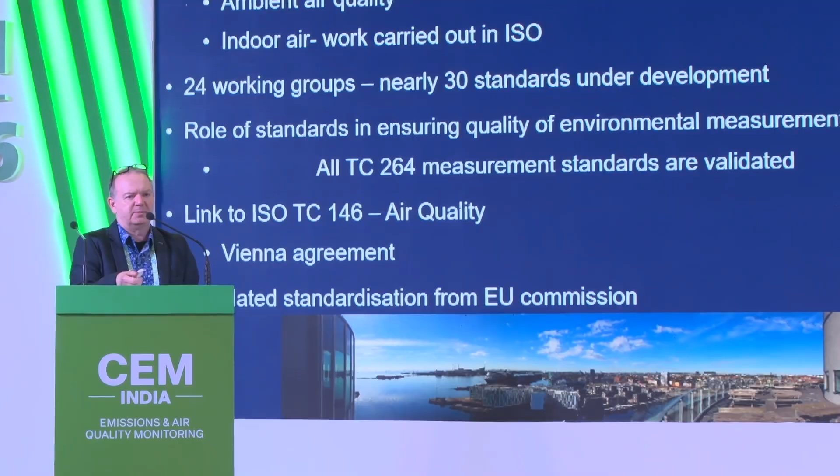So CEN-TC 264 is a standardization committee. It's responsible for the emissions standards and the ambient air quality standards in Europe. And most of those standards that we develop are there to provide the measurement capabilities to underpin the regulatory instruments, so the regulation within Europe.

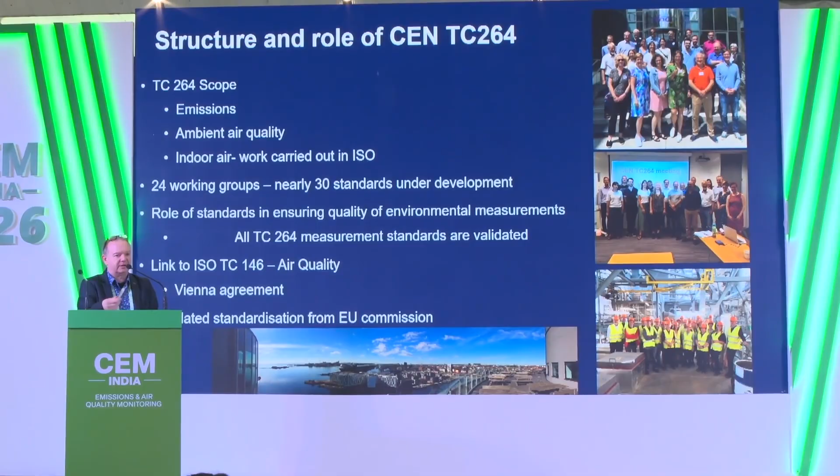We have 24 active working groups at the moment, so each one of those working groups is made of technical experts. Those experts come from industry, they come from instrument providers, they come from regulatory authorities, and between us we are developing, I think, more than 30 standards at the moment.

One of the key things that we do with our standards, the measurement standards in TC264, is that they have to have validation data. So when we produce a measurement standard, we also have to do validation studies to understand the performance that that standard can provide. We also work closely with ISO TC 146, which is responsible for air quality standards and emission standards internationally.

So within ISO TC 146, that covers stationary source emissions, workplace, ambient, some general standards, and currently in the general committee they're working on a standard on the units that are used and the definition of units of measurement, also meteorology and indoor air. And the Secretariat of Subcommittee 1, which is the stationary source emissions, is held currently with NPL India. So there are 3 work items currently underway in 146.

2 are the revision of the flow standard, and we've heard talk about reporting mass emissions and emissions trading, and clearly if you're going to do that you need to be able to measure flow and have flow CEMs, and so those 2 standards provide both the manual reference method and also the CEM standard for flow monitoring. And there's also a gaseous fluoride standard under development.

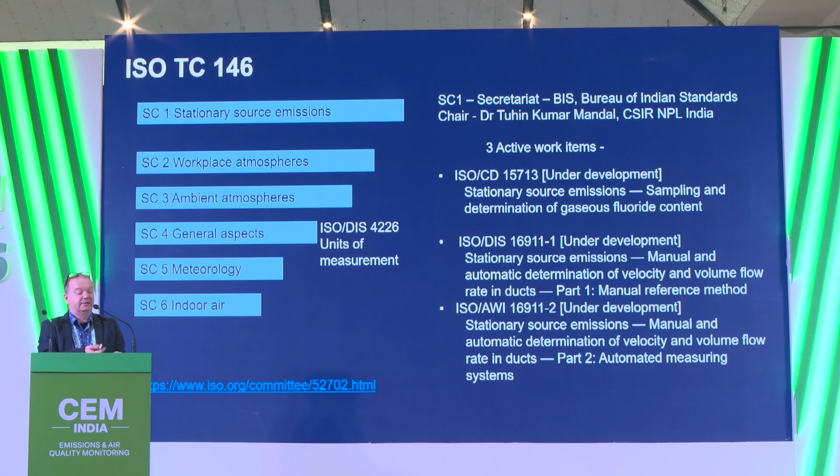Within Europe, as I say, we are driven by a number of regulations, one of which is the Industrial Emissions Directive. And a lot of the work that we're doing at the moment related to emission standards is because the regulation was revised in 2024 and is coming into force pretty much this year in terms of some guidance which the Commission is producing and an implementing act.

And currently there are about 37,000 industrial installations and about the same number of industrial farms. So the revision of the IED brought agriculture into the regulation. And so the kind of emissions monitoring needed there is fugitive emissions monitoring from the waste handling and the barns. So we have a number of new sources.

And the regulation also brought in a whole range of new industrial sources, including landfill, some metal and the battery factories and recycling. And one of the big issues we face at the moment is that the regulation is forcing the emission limit values, the concentration levels, down. And so we are having to revise the standards to meet lower and lower levels.

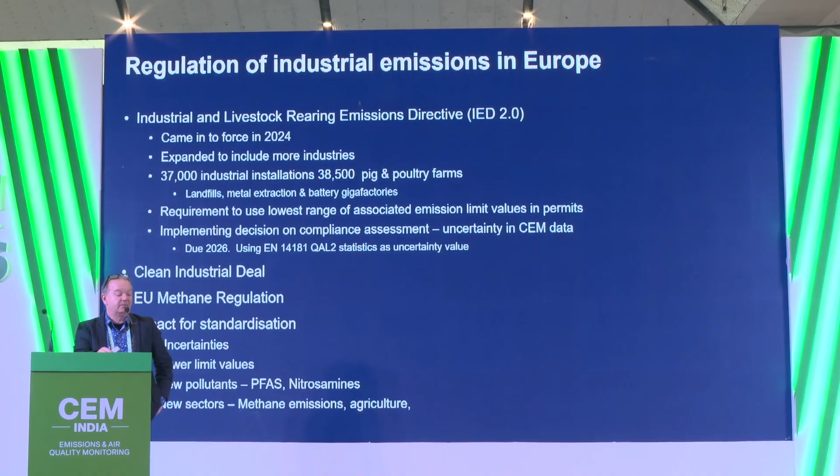As I mentioned earlier, the Commission has also published a clean industrial deal, so the regulation there is pushing for growth through cleaner industry. We also have a methane regulation, which is an act requiring the energy industry, so the gas industry and mining, coal mining, to report and measure and reduce methane emissions. And so this is all forcing new standards to be produced, including new pollutants, and we're looking at PFAS and nitrosamines coming from cleaner energy, and new sectors, as I say, methane and agriculture.

I just wanted to put this slide up to show how we manage the whole quality of emissions monitoring in Europe. And we heard a lot about the kind of requirements from Sanjeev around putting in place the quality assurance. So the primary standard that we have is EN 14181, and that defines how CEMs or AMS instruments are brought under control. 14181 provides how we control the quality of the data from the automated measuring systems, or the CEMs systems.

And the way that works in Europe is that we have the pre-assessment, so that's the type approval, the same kind of testing that NPL India are undertaking for the Indian market. And the performance testing standard is 15267, and we have a part 3 for continuous monitors and a part 4 for portable instruments that are used if you're going to calibrate instruments using them as reference instruments.

And the way that we control annually the CEMs instruments in Europe is that accredited test teams carry out reference measurements, and so the calibration is against reference standards. And so we have reference standards and we have alternate reference methods which are then used on annual assessment of the analyzers. And that's both a calibration, the QAL2 approach, parallel measurements with the reference method and the CEMs, and then the annual surveillance checks. So every 3 or 5 years, we do a recalibration.

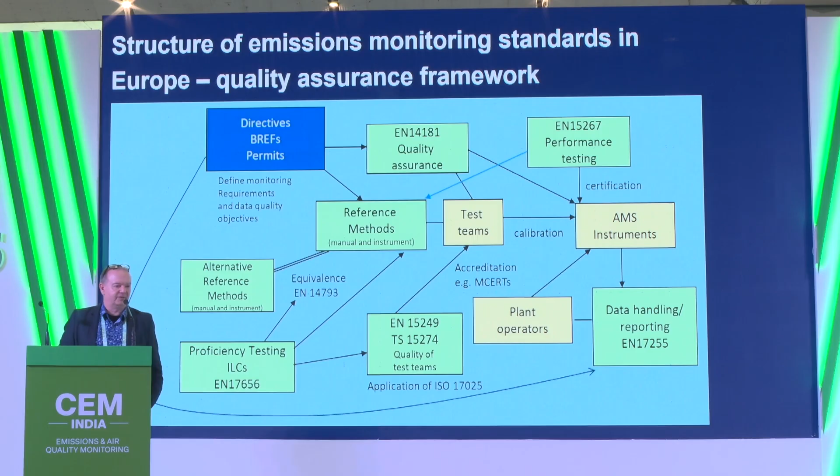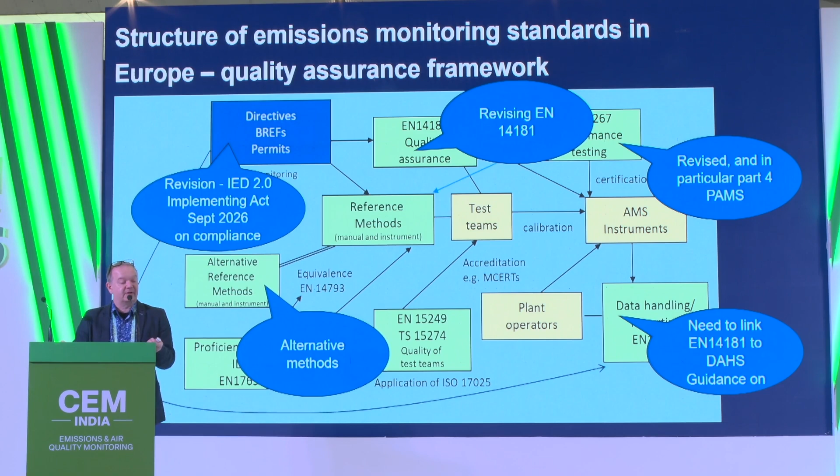So we have a whole ecosystem of standards that all work together to underpin the quality, and we are continually revising and reviewing those standards. So these are the standards that are currently being revised or have recently been developed. We're producing guidance on how to do that annual check of the data handling systems. We're currently revising EN 14181, and we have other revisions and new standards related to the new Industrial Emissions Directive 2.0. I won't go through these in detail, but these I'll leave in the presentation.

These are the current active working groups, and these are the standards that we're currently working on. We have long-term dioxin sampling, we have long-term mercury sampling, we have several activities in Working Group 9 related to the revision of 14181 that I chair, and then we have bioaerosols and diffuse VOCs and methane emissions from industrial sources, a new standard on formaldehyde, standards on instrumental odor monitoring, just published a standard on proficiency testing, and we also have a task force emissions that looks at overall emissions related issues and identifies guidance and new issues on emissions. We have a new standard looking at emissions from buildings, and that relates to the agricultural emissions.

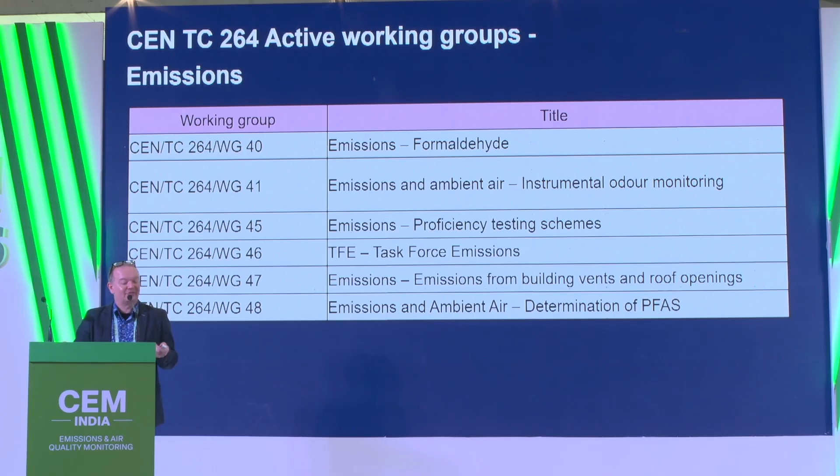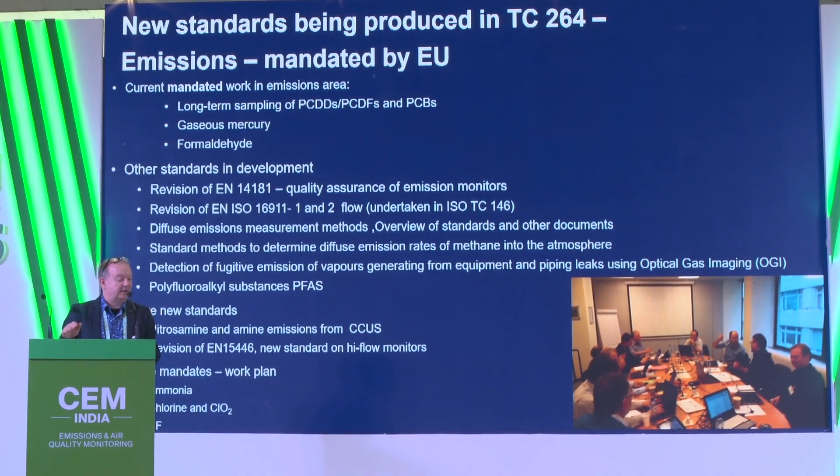And we have a new working group started looking at per- and polyfluoroalkyl substances. So these are some of the work that we have currently underway. As I say, we're revising 14181. We have the revision of the flow standard, and we have new and future standards looking at nitrosamine and amine emissions from carbon capture and storage, and a new standard underway to look at standards that will support the monitoring and reporting of methane emissions.

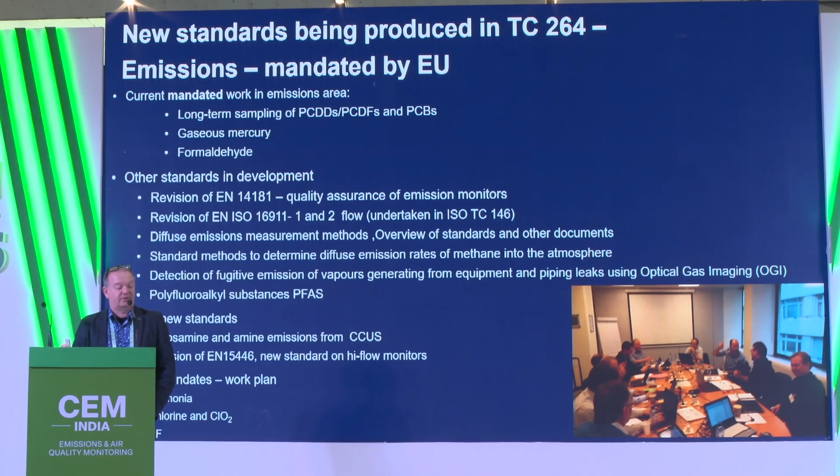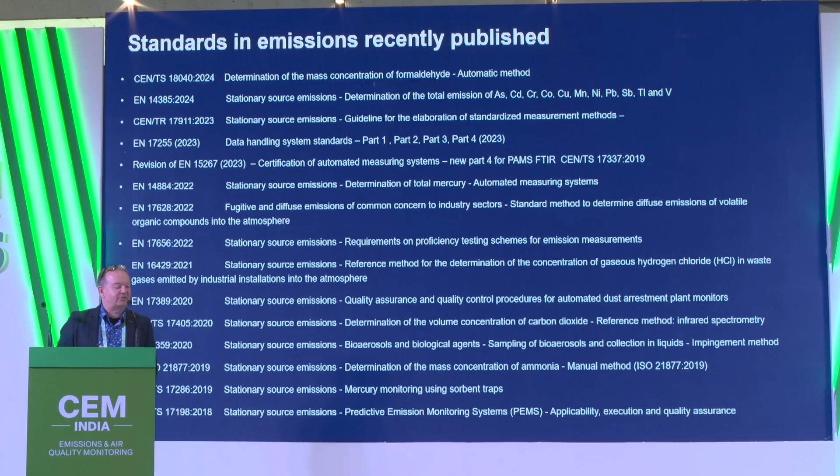So 15446 is a sniffing standard for leak detection from industrial sources, and we have a new standard we will be doing on high flow monitors that quantify leaks and fugitive emissions. And the Commission is asking us to produce standards for ammonia, chlorine, and chlorine dioxide. This is a list of recent standards. The talk will be available. I won't go through this in detail, but these are just some of the standards that we have recently published in the last 3 years.

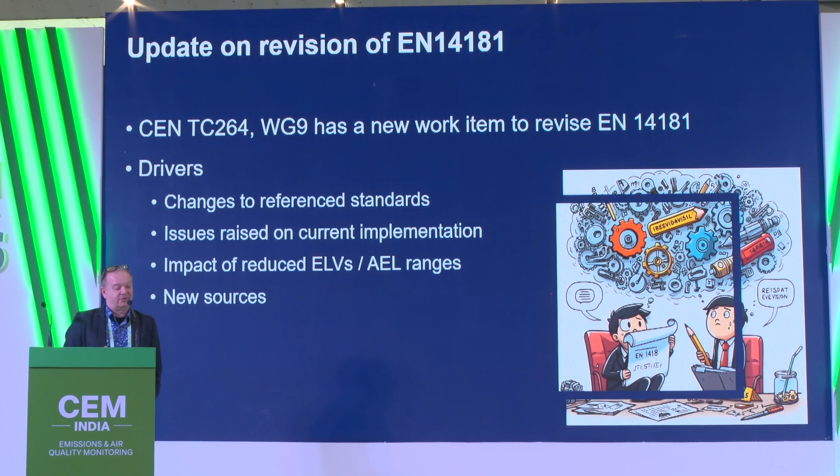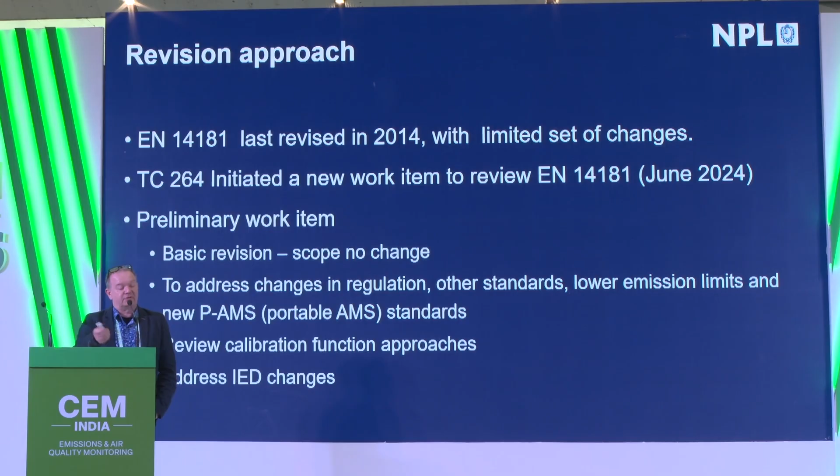Just briefly on the revision of 14181. So within Working Group 9 that I chair, because of changes to the regulation and changes to the reference standards, we understood we needed to revise 14181, but we also took the opportunity to review the issues. It was last revised in 2014, and we basically looked to a set of changes to bring it up to date. We requested what the potential changes would be, and we got 46 pages of comments from the users of the standard.

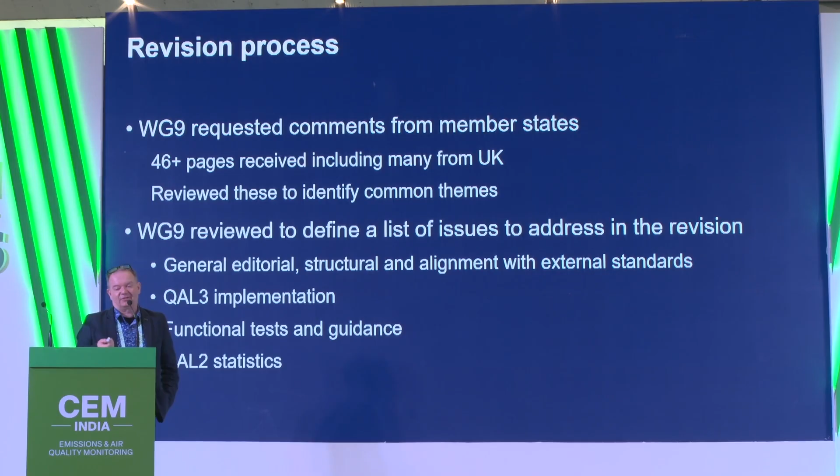We've reviewed those, and we have underway some subgroups who are looking at aspects of 14181 to revise. That includes the QAL 3, the ongoing control of the analyzers. So this is the drift correction of the analyzers. We also have guidance on how to carry out functional tests that the instruments are working properly. And we're looking at the statistics and the uncertainty from the QAL 2 calibration function. And these are some of the work we're doing.

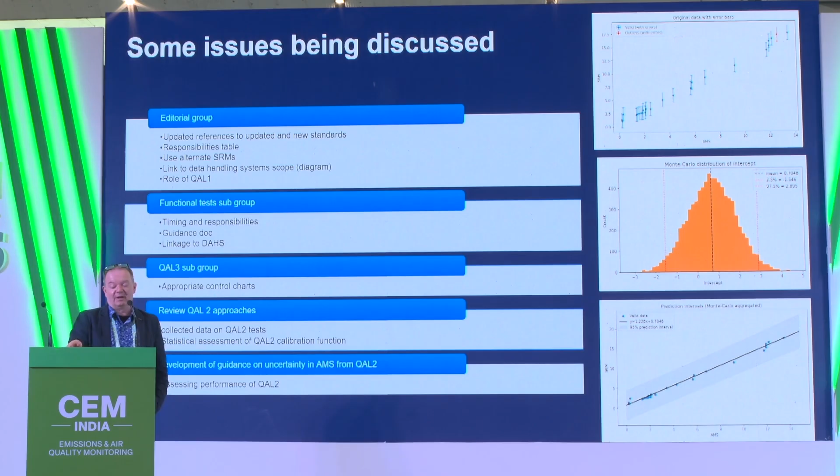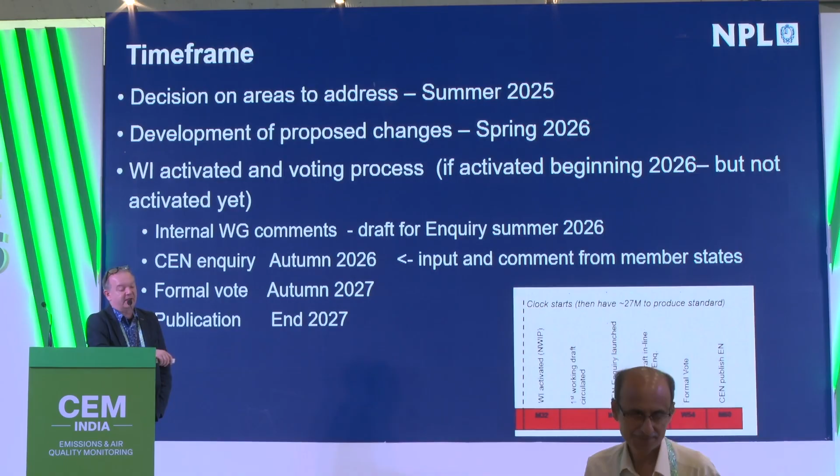And the graphs on the side are just some work I've been doing, taking historical calibration functions and running through the uncertainty of the reference methods. So as I say, the calibration is calibration of a reference method in parallel with the instrument. But as we're going to lower and lower concentrations, the uncertainty in the reference method is becoming more significant. And so I did some Monte Carlo analysis of how that uncertainty feeds through the calibration function. So we hope basically to get a revision of that standard through and the first draft out next year. That will provide some new guidance and some new approaches, and potentially new approaches to the QAL 2 function.

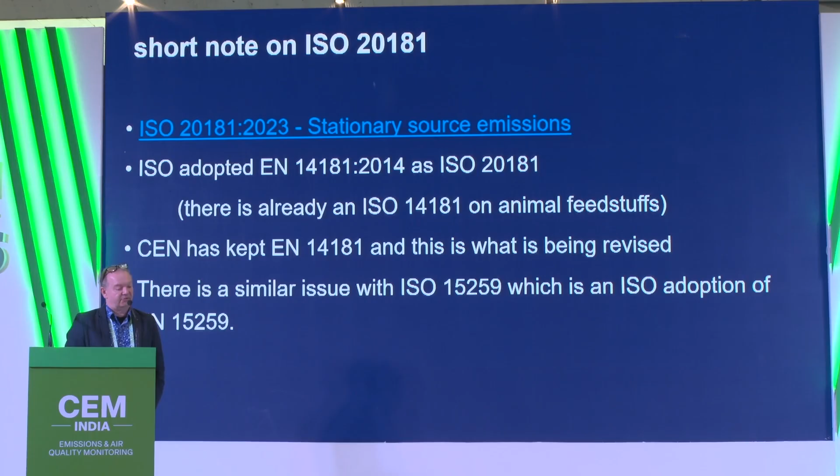And just in case you're aware, ISO adopted 14181 but gave it a new number, 20181, because there was an existing ISO standard. So while the revision is happening in CEN, we will then clearly look to whether ISO wants to revise the ISO version in line with that.

Just to give you an update, we have a new working group looking at polyfluoroalkyl substances. And as you may be aware, there's about 5,000 chemicals. And so this is a challenge to identify which species. Now, you may think, historically, PFAS has been a water quality problem, and maybe this should be over in the other stage. But increasingly, we're seeing air transport of emissions, so aerosolized PFAS going into the atmosphere and being deposited in rain.